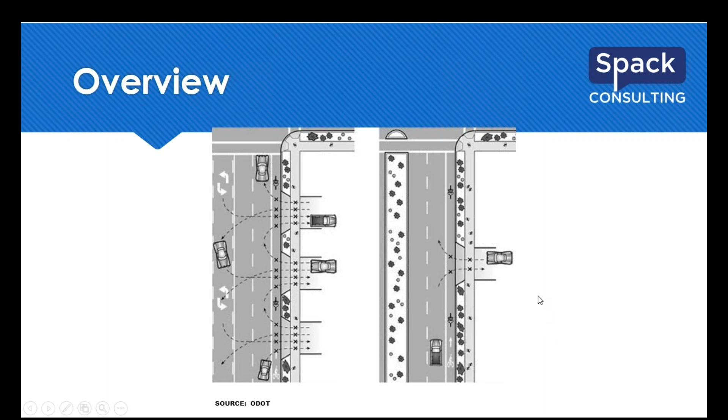The less conflict points, the safer the road generally will be. But of course, it's our job to balance safety with mobility. So it doesn't mean we're going to put right-in, right-outs only at every access. It's part of our job as professionals to balance these somewhat conflicting operational things.

Really why we look at access management is safety. You're trying to make it better for the people coming in and out of those driveways, better for the people on the main lines. Once you eliminate a lot of those movements, it becomes a safer roadway for all those involved.

The second reason is obviously to improve operations. Here's a shot of a freeway, the ultimate example of access management where everything goes through the interchange. It's very defined where you can get on and off, and it becomes, in general, good operations, very safe operations, notwithstanding those peak times when they can get congested.

We'll start with the bigger overview of improving access management and safety. The first thing in the handful of options, tools at our disposal, is to just get rid of driveways and access points. Reducing the number of access points per the previous diagram will reduce the conflict points. If we can get rid of driveways, that is a step towards making things safer.

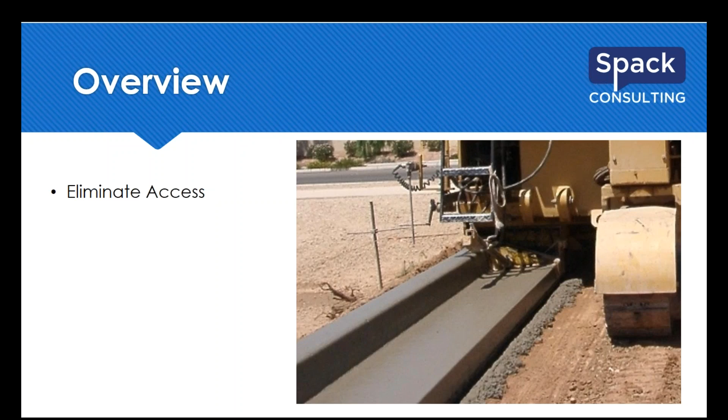The second option, also shown in that figure, is consolidating access. If we can have one driveway instead of three, you're saving a lot on those conflict points. You're making things better. If you can put a road down the property line and serve multiple properties through it, you're much better off than trying to serve them all individually.

The third on our list is to reduce some of the movements into those access points. That would be placing a median down the road to convert it to a right-in, right-out, or leaving an opening in that median so vehicles can turn left into the site, but only turn right out. That would be called a three-quarter access.

You can also just put up signs at a driveway saying no left turn out, but we have plenty of videos of driveways with people disregarding those types of signs. So occasionally we believe you need some enforcement to really drive home those kinds of restrictions that are just out there based on signs. This could also be a one-way movement, changing a driveway from a two-way access to a one-way movement, either all entering or all exiting.

It's really just speaking to trying to reduce the number of movements, again trying to reduce those conflict points and improve safety and operations.

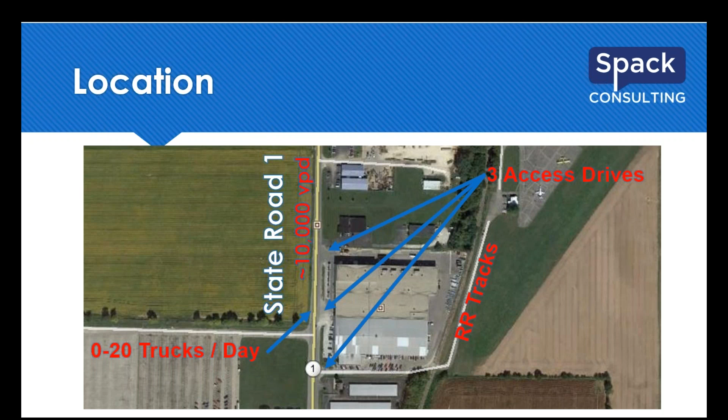So the basic question which fed into this access management and what we were looking at is, can we improve the truck operations on this road? How do we figure out a way to keep the traffic moving, get the trucks in and out, and essentially try to keep everybody happy while improving the overall safety of the site?

Yeah, as the road is getting busier and conditions are changing with the developing area, building owners recognize there are issues, and they also want, in addition to the state DOT wanting a safe road, they also, for their operations, want a safe situation.

All right, so here, looking at some options - this was just, as we started out, a brainstorming exercise of looking at the site and what are some options that we can think of how to improve it.

And the first obvious one is, can we move those doors? Can we just close that access and have the trucks go somewhere else? Now this obviously has a lot of implications for the site. They'd have to reorganize everything essentially. Their internal operations would change, where the trucks would load and unload would change. They would have to build that new infrastructure to accommodate it. But just looking at it, that becomes the first obvious one of, hey, if you can do this, that's the way to go. Don't try to make the best of a bad situation. Change your situation and make it better.

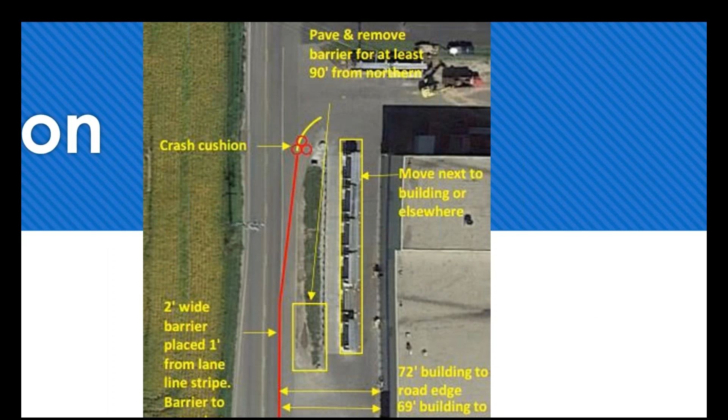All right, so yeah, we kind of took these ideas and boiled it down into 2 options for the team working on this to discuss and look through. So just right up front, a couple things that we talked about was adding some signs beforehand, providing some of that warning of what's going on.

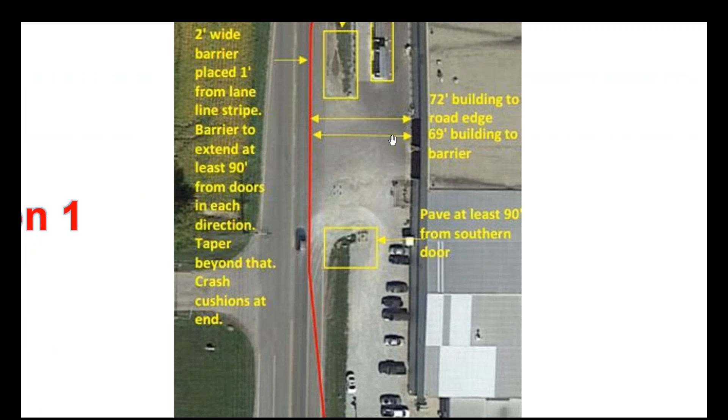Mike zooms in here, you can see in this option we're closing that center access, so we wanted to get rid of that. That red line there, what we're thinking of is a physical barrier, a concrete barrier that would separate the highway traffic from the roadway here. And you can see we measured it out, and we've got about 72 feet there.

So if you put the 69 from the building to the barrier, that should give us enough room for those trucks to maneuver. But right along with that, we've highlighted some areas in yellow, those yellow boxes. We need to pave some areas too to allow them to have more space.

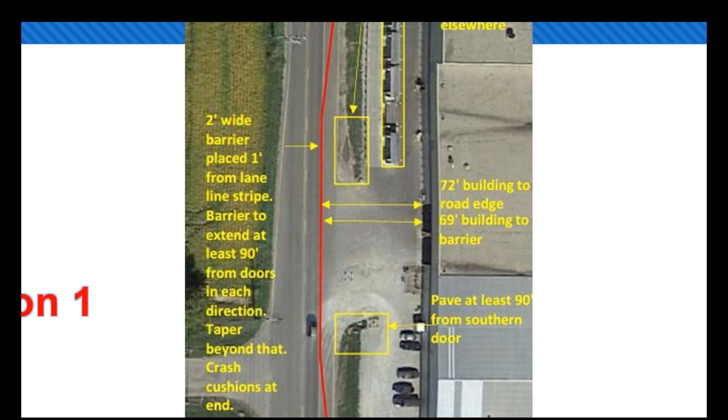And then as you look, you can see on their site they've got some stacks right in front there. All those would have to be moved, either shifted closer to the building or moved somewhere else completely, so that a truck has a lot of room to maneuver back and forth.

So another item, you can see, if we're going to introduce a barrier, we need to put crash cushions on there. We need to have a well-defined radius to come around that corner, just defining that access a little bit more and protecting where that barrier starts or ends, depending on which direction you're going.

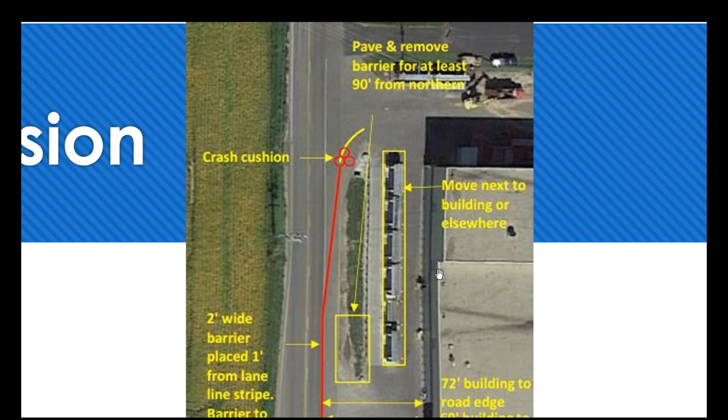And then down on the other side, you can see we've got the same thing with the crash cushions and defining that radius, as well as adding some more pavement, another paved area, to have that corridor next to the building from one access to the other. So we'd have to pave that in there, and that would be an implication for some of their parking too.

You can see the cars parked there right next to the building. If you got trucks coming through that area, those may have to move as well. So again, a combination of different things, looking at some signing to let people know what's going on, let them know that there's no shoulder for this area with that barrier coming up, making sure the barrier is protected, paving some areas. But all in all, we're essentially trying to take those maneuvers, put them on the other side of the barrier, separate that traffic out, so we get that separation.

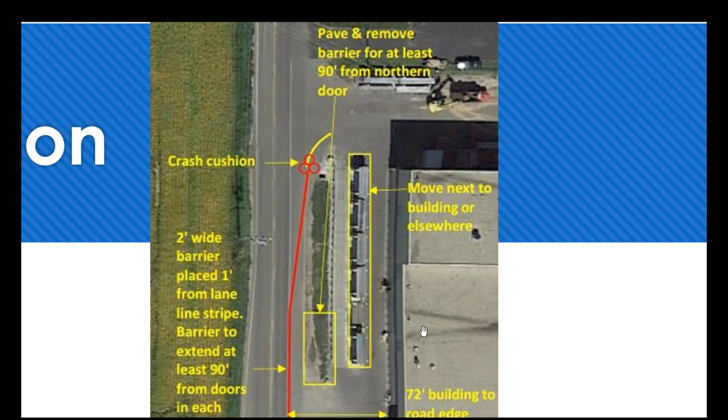So that was option 1, and as soon as I unzoom, I'll be able to move to option 2. This was similar in terms of how we looked at it. You can see the north end here looks pretty similar. We've got the barrier in there, still some paving areas, things to move. What changed on this one is the south end.

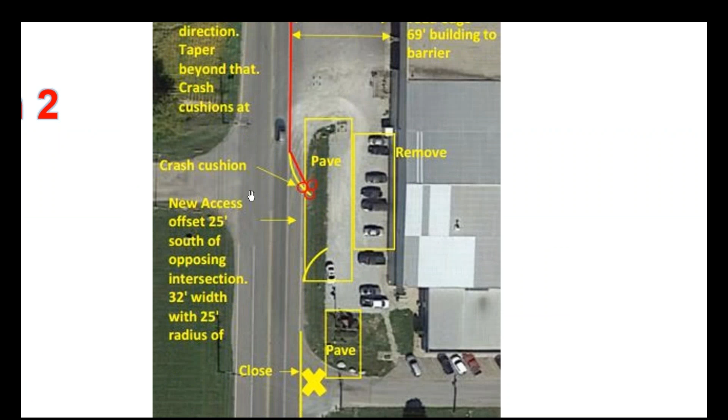So this is where we're looking to close that farthest south access and try to move it north for two reasons. The first is the idea that maybe those trucks can get to that easier. They can turn in, and it's not a series of turns, just a pull off and come in, as opposed to the other where they'd have to right turn into the access, then left turn into the development.

Option 1 had a much sharper maneuver, turning right in here and then coming north. If we can square up the intersection more with the public road on the west side, can we have more of a gentle swooping right turn, so they can stay in the right turn lane or on the shoulder and keep moving at 10 miles an hour right into the site without causing a backup.

Of course, this shift for employees would change up the parking lot here and also make them essentially do a U-turn, which there is enough room for a passenger vehicle to make, to come down and get over this parking. You'd change the angle of parking to go the other way probably.

So it has ramifications, but if we're starting from scratch, this is closer to what we would be recommending if we were starting with just a site plan and the building wasn't there yet - that we'd want to square up this intersection and get them into the site here, instead of having multiple driveways and intersections close to each other.

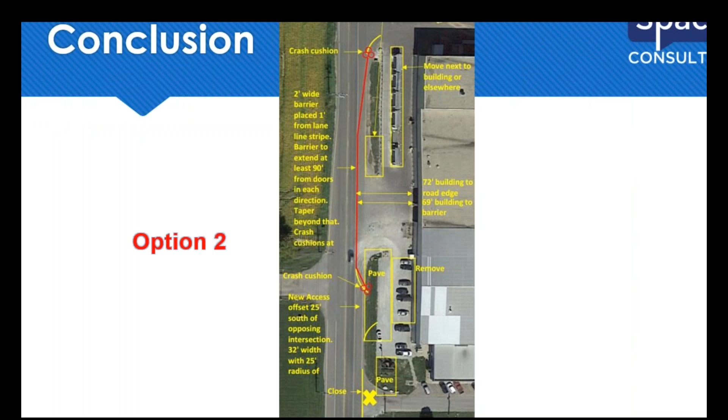So you can see from both these options, we're really taking a combination as we look at the access management and then how these maneuvers come through with site circulation and everything. We did our best to remove and consolidate, so we went from 3 to 2 in both options, and we tried to square up the intersection in option 2 and separate out those movements.

So again, this was a more difficult one. There wasn't really an easy answer, and we went through our 2-step process: let's brainstorm, then get back with our client, talk about these options, and come back and figure out where we're going to go next based on the feedback.

And we should say we were basically working in the area of this private owner coming to us, and things like getting down to a single driveway for all their traffic, that was not palatable, or forcing the trucks to go all the way around the building to loop around - they were resistant to that as well.

So you can look at further ideas, but we're trying to improve the situation, recognizing we will not get to an ideal perfect situation. We're trying to make incremental improvements for them. So that's the limitations we had in working on this project.

As traffic engineers, it took a while for me to understand this, but whether you're working for a government agency or as a private consultant, you end up having constraints imposed on you by whoever's paying the bills. They'll say, okay, we'll go this far, but we're not going to your ideal solution, Mr. Engineer, that you're proposing here. There's obviously, we still want it to be safe, so we want to make sure we're comfortable moving forward with whatever we propose.